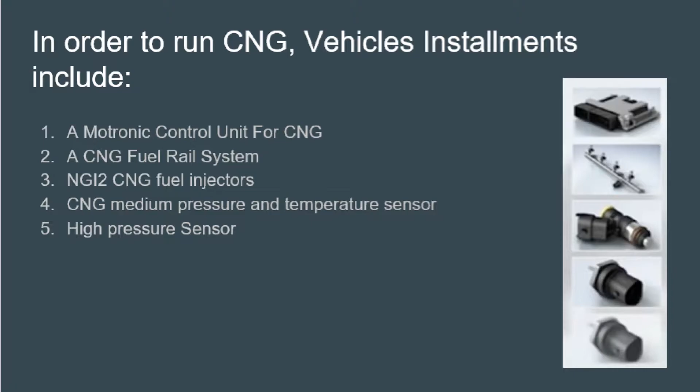So in order to run a vehicle off of CNG, they will need to be equipped with a Motronic control unit for natural gas, a CNG fuel rail, NGI2 CNG injectors, CNG medium pressure and temperature sensors, and a high pressure sensor. So the way a CNG engine works is during the drive, a bi-fuel system can switch from natural gas to gasoline operation with no change in torque.

During CNG operation, fuel lines conduct natural gas from the fuel tank where it is kept under high pressure to the pressure regulator. The high pressure sensor continually monitors pressure levels in the high pressure system. Within the pressure regulator, the natural gas is brought from 200 bar down to 10 bar. From here, the natural gas is conveyed via the CNG fuel rail to the injection valve. The CNG medium pressure and temperature sensor measures the temperature and the pressure in the rail system.

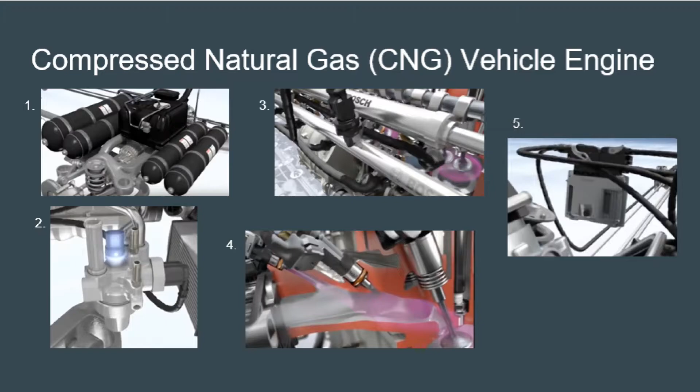According to exact specifications, the NGI2 injectors now inject the natural gas into the intake manifold. The resulting natural gas air mixture is then ignited by a spark plug. The Motronic control unit for natural gas handles engine management throughout the system.

Now let's talk about the cost of CNG usage in vehicles. The primary driver behind why companies would want to use natural gas as a fuel in vehicles is the difference between the cost of diesel or gasoline compared to the cost of CNG. All natural gas projects require an upfront investment that needs to be paid off with fuel savings, and those fuel savings have been consistent and growing over the years, and the EIA projects that they'll continue growing even more.

However, there are challenges faced when implementing a new design. In order for transportation vehicles to run off CNG, a conversion kit installation on cars is necessary. Conversion kit manufacturers that make kits to convert gasoline engines to use CNG will require an upfitter's cost to put the kit on the vehicles. This obviously increases cost. Each kit engine combination requires a certificate of conformity from the Environmental Protection Agency, basically saying that it meets the emission standards. But that also kind of limits the number of vehicles being offered as a CNG version.

The cost of CNG vehicles depends on the size of the vehicle and the range the vehicle needs to travel. The size of the vehicle matters because smaller vehicles traditionally use a gasoline engine. Gasoline is simpler and cheaper to convert to a natural gas engine because it's spark ignition. You also have a lot of the same attributes and components of the engines. Larger vehicles, however, use a diesel engine which relies on compression ignition, so having to change the ignition in the engine is going to drive up cost because it is going to require more engineering.

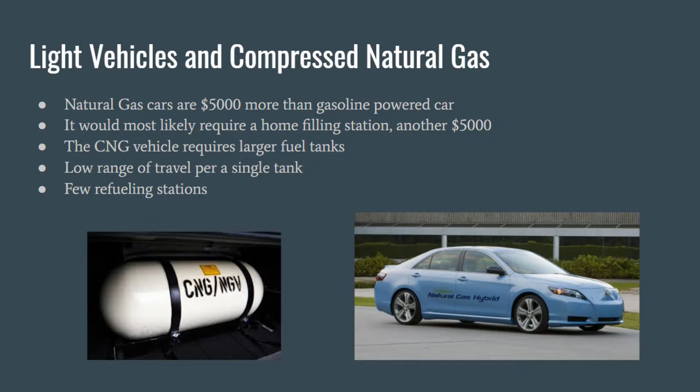The cost of converting the current industry of personal cars from gasoline to natural gas makes it very unattractive. This may change as gasoline becomes more expensive and the natural gas industry grows locally.

Now, as for heavy vehicles, natural gas fuel sees most of its efficiency with heavy vehicles used for commercial and public use. Heavy CNG powered vehicles are under the same limitations as cars, and maybe even more as the hauled weight calls for almost daily refueling. Many companies, such as the Centre Area Transportation Authority, CATA, have been using CNG for their fleet for many years.

The biggest potential for natural gas is with long-haul trucking using liquid natural gas. Liquid natural gas is roughly a time and a half more dense than gasoline. This increases the range per tank of fuel and solves the problem of refueling stations and low range of CNG. Specialized refueling stations already in place for large vehicles, such as tractor trailers, can more easily have a natural gas option implemented into the existing infrastructure. This will allow these trucks to span the country on natural gas.

The upfront costs to convert fleet vehicles to natural gas can be offset by lower operating and maintenance costs over the lifespan of the vehicle. The payback period depends on the fleet's average distance traveled, required refueling infrastructure costs and other considerations. A truck running on liquid natural gas will begin making a profit in just 5 years after purchase.

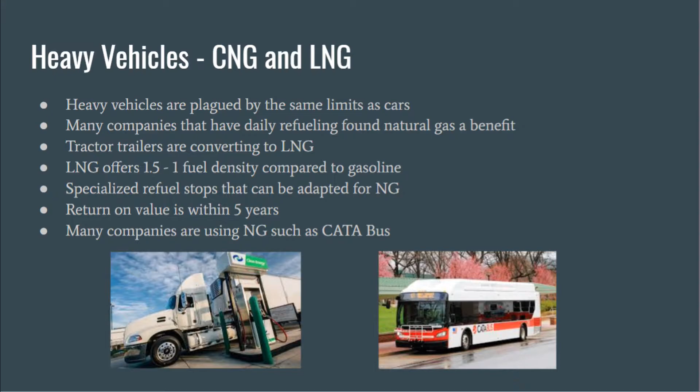A number of concerns arise when it comes to vehicles with natural gas tanks and engines. For instance, a car collision where the fueling system becomes compromised can be dangerous for all, especially those unfamiliar with NGVs. It is crucial to notify those on the scene, including any first responders who are very up close and personal with the vehicle involved. It is also pertinent to properly identify what type of natural gas the vehicle runs on, so that the respective measures can be taken in order to stay safe. It is suggested that the vehicle be inspected before returning to the road, so it's best to get a tow instead of taking chances.

Liquid natural gas is stored and remains at extremely cold temperatures. It is significantly more dense than air and tends to puddle up in fog clouds near the ground when it leaks. This fog is incredibly dangerous and needs to be avoided until it can be properly contained or removed from the scene. Compressed natural gas is a lot less dense than its liquid counterpart, and air alike, so it most often dissipates into the atmosphere when it leaks. Any amount that remains tends to give off an odor like rotten eggs, which is easily identifiable. As with conventional fuel, both types of natural gas are flammable and dangerous when in contact with skin, as well as when fumes are inhaled.

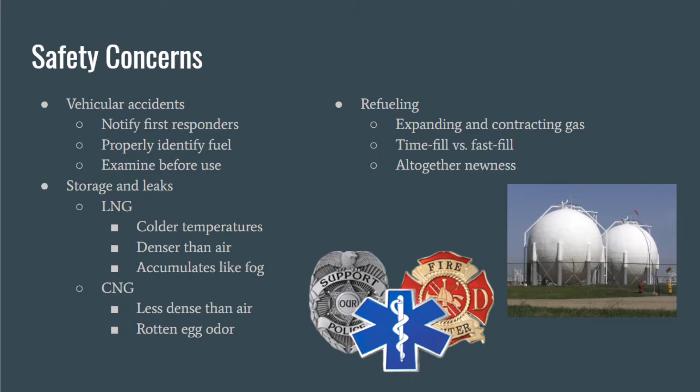The overall newness and differences between fueling conventional fuel and natural gas is often enough to cause difficulties. If we have learned anything from Oregon in the last year, it's that teaching people how to fill up their tank isn't always easy.

Energy security for the United States, once considered an impossible goal, is now within our reach with the abundant supplies of natural gas available today in North America. We've been using natural gas in our homes and businesses for heating, hot water, and cooking for more than 100 years. But natural gas can also be used to fuel vehicles. Compared to some other vehicle fuels, natural gas is clean, abundant, affordable, and American.

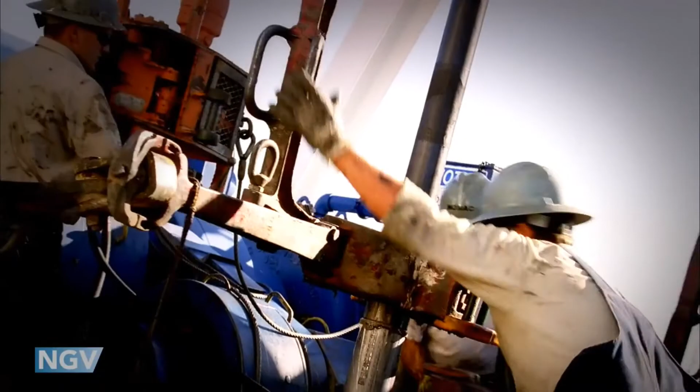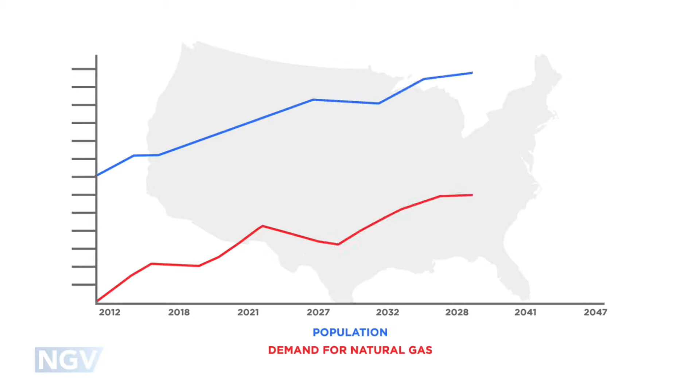Recent technological and economic developments are providing greater access to large reserves of natural gas under North American soil. Today, these reserves are projected to meet U.S. energy needs for generations to come. Natural gas vehicles, which are sometimes referred to as NGVs, have been around for decades, operating on roads around the world. NGVs are available in all vehicle classes, including passenger vehicles, transit and school buses, refuse, and heavy-duty trucks.

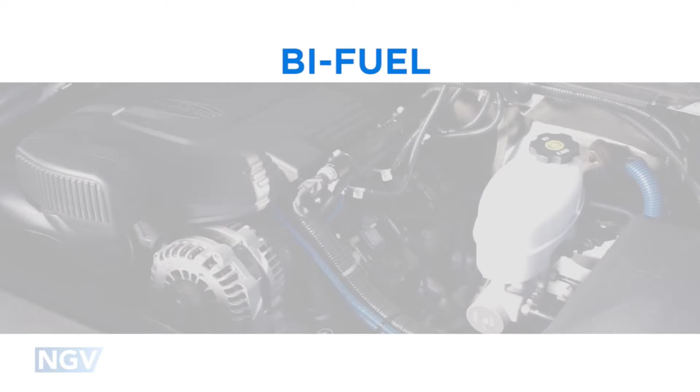NGV engines operate in a manner that is very similar to gasoline or diesel engines, except that natural gas combusts in gaseous form rather than as vapor. NGVs are available in two basic configurations: dedicated NGVs and bifuel NGVs. Dedicated NGVs run on one fuel only, compressed or liquefied natural gas. Bifuel NGVs have internal combustion engines that run on natural gas and gasoline.

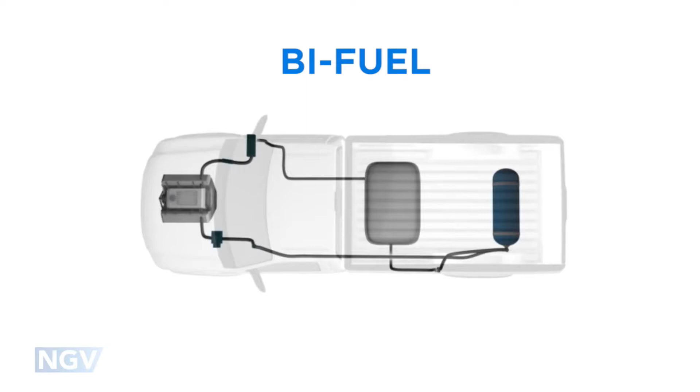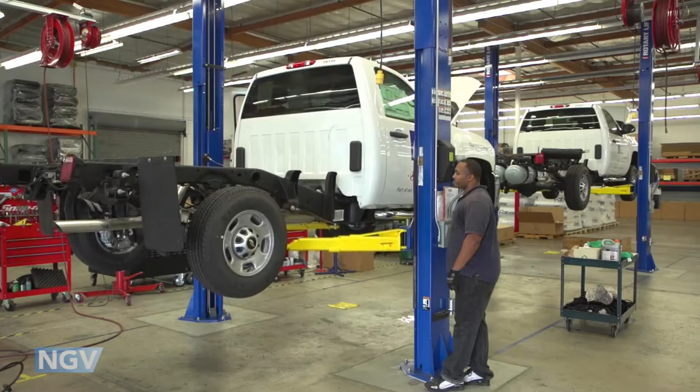With bifuel vehicles, the two fuels are stored in separate tanks and the engine runs on one fuel at a time. Factory-built NGVs are available from various automotive manufacturers. Additional vehicles that are powered by compressed natural gas are also available through a conversion process. One of the benefits of NGVs is the price advantage that they offer over gasoline and diesel-fueled vehicles, which can be significant. Natural gas is less expensive than other vehicle fuels, and its price is less affected by the unpredictable changes in the world's oil market.

As a result, drivers of natural gas vehicles can save 40 to 50% per gallon at the pump compared to gasoline and diesel. This price difference can result in significant fuel cost savings year after year. Large transit or trucking fleets switching to natural gas can save millions of dollars per year. In recognition of their environmental benefits, solo drivers of NGVs are allowed to use the HOV or carpool lanes in several states.

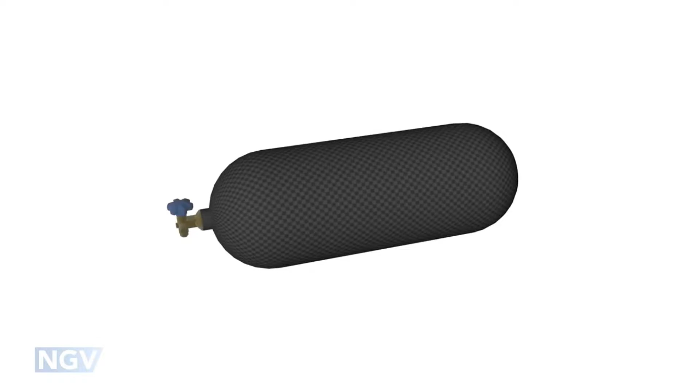Natural gas vehicles have a safety record similar to vehicles powered by other fuels. The fuel tanks or cylinders that hold the natural gas fuel on the vehicle feature robust designs and are engineered to provide years of reliable service. Natural gas is one of the cleanest alternative fuels today. NGVs produce fewer smog-forming pollutants compared to most diesel and gasoline vehicles on the road. Renewable natural gas, or biomethane, is an even greener fuel by offering reduced greenhouse gas emissions, which contribute to climate change.

There are more than 15 million natural gas vehicles already in operation around the world today. These numbers can only continue to grow as more NGV options become available and consumers recognize that natural gas for vehicles is clean, abundant, affordable, and American.

All right, now to address the issue of using natural gas to fuel planes. So for using natural gas, or more specifically liquid natural gas, to fuel planes, it's already in development. The issue as to why it's not spreading as quickly as it did for trucks and buses are the following. The natural gas industry at its current state does not allow it to expand. There are specific parameters that need to be followed in order to use liquid natural gas for plane fuel, and there's a lack of technology that prohibits us from actually using it safely for planes.

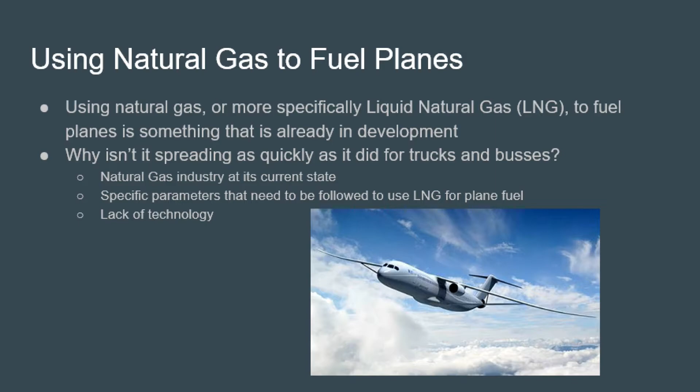Now, the issues surrounding natural gas for planes fall into three different categories, as I just mentioned. The first being the natural gas industry, being that there's not as many natural gas suppliers as there are fuel suppliers. So you'd have to actually increase the number of stations in order to get enough natural gas to fuel planes to make them more frequent than jet fuel planes. Another is that natural gas needs specific parameters in order to be used safely. One of the largest barriers to overcome is the fact that liquid natural gas reacts violently with water.

Another thing is that liquid natural gas needs to be kept at specific pressures throughout the entire flight, even though the plane is changing pressures as you make your entire flight. You need to keep the liquid natural gas at the exact same pressure the entire time in order to reduce the possible dangerous side effects of using liquid natural gas.

Another thing is that safety tests, in order to actually implement liquid natural gas into planes, would take about 5 to 7 years to even complete before liquid natural gas planes could even hit the market. The last thing is that the technology isn't there. One of the things that we would actually need in order to use liquid natural gas for planes is a superconducting system to keep it at the correct temperature.

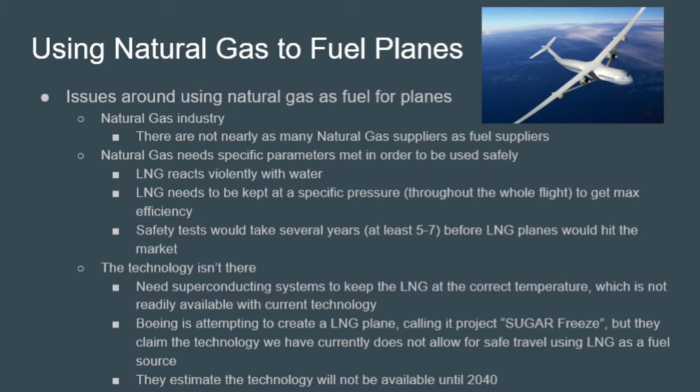Now, while there are issues with using natural gas for planes, there are obviously many benefits. One of the benefits being that liquid natural gas evaporates quickly when exposed to ambient temperature, and it will not pool dangerously like traditional jet fuel. So in the case that you end up getting in a crash again, say it's on land, you wouldn't have pooling like you would with jet fuel if the fuel line breaks. The liquid natural gas would just evaporate and you would have a much more reduced chance of explosions.

Liquid natural gas also has a higher ignition temperature. Again, you would have a less likely chance of an explosion as opposed to jet fuel. The liquid natural gas will not combust as easily. It is also much more fuel efficient than jet fuel, which is the primary reason for switching from jet fuel to liquid natural gas. Boeing predicts that they will actually reduce the fuel burn by 57% by using liquid natural gas instead of jet fuel.

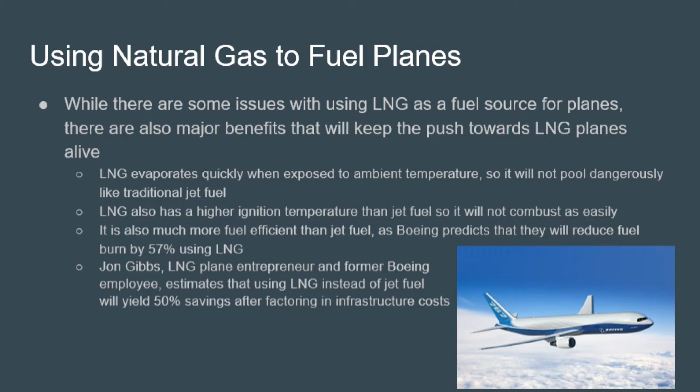Jon Gibbs, liquid natural gas plane entrepreneur and former Boeing employee, estimates that using liquid natural gas instead of jet fuel will yield 50% savings after factoring in infrastructure costs. Natural gas as a transportation fuel source has been around since the 1930s. According to the Natural Gas Vehicle Coalition, there are more than 150,000 natural gas vehicles on the road today.

However, even though natural gas technology has improved in recent years to allow for proliferation of natural gas vehicles, there are still some challenges that natural gas vehicles face when it comes to infrastructure and practicality of using natural gas as a fuel source. As a transportation fuel source, it has a few similarities to gasoline. For example, a compressed natural gas tank is a storage device of similar size and shape and can be stored in the same locations as on a gas car. Also, a compressed natural gas tank can be filled in a similar manner as a gasoline tank.

However, the disadvantages natural gas faces in the transportation field are substantial. A few examples of problems these vehicles face have to do with the infrastructure and economic drawbacks surrounding using natural gas as a fuel source. Natural gas infrastructure in the United States is far less developed than it needs to be in order to grow an aggressive expansion in the transportation sector using natural gas as a practical economic competitor to gasoline.

Some of the challenges facing natural gas vehicles are a higher initial cost of ownership, a very limited refueling infrastructure, and some of the performance characteristics of natural gas vehicles. Initial cost of creating a natural gas vehicle is generally higher than its gasoline counterpart. A study in the University of California shows the difference in price between two identical models. The 2014 Honda Civic is a difference of over $8,000, more than 40% more than its gasoline counterpart.

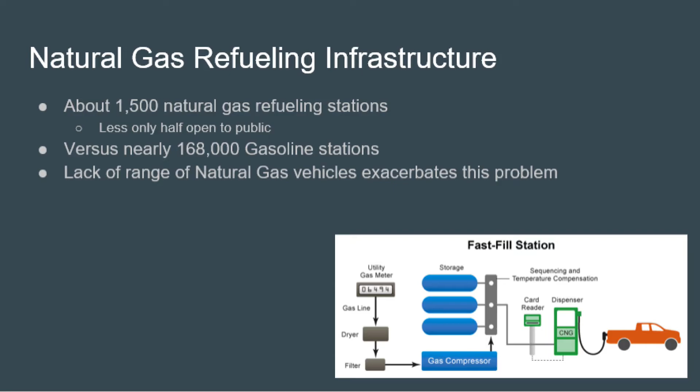Finally, the lack of range of natural gas vehicles makes them difficult to rely on for trips of significant distance because of the lack of infrastructure surrounding these vehicles. However, once these challenges are overcome, natural gas can be more economically practical than gasoline, especially for vehicles that are focused around using high volumes of fuel like taxis, semi-trucks, and buses. In the past, natural gas vehicles have been about 30% less expensive than gasoline vehicles to refuel, and in many cases, the maintenance cost for natural gas vehicles is less over time than their gasoline counterparts.

In a more macro sense of economics, natural gas vehicles have the ability to reduce the United States' dependence on foreign oil, creating a safer and more stable energy supply in the United States. In addition, compressed natural gas prices are much less volatile on average than gasoline. A large reason for this is the politics of trading and deals around the world. While crude oil is largely supplied to the U.S. from outside sources, the reserves of natural gas inside the U.S. are large and the potential for more supply is great, so prices have been in the past and continue to be much more stable than gasoline.

And here is a quick video to help explain a little bit more about using liquid natural gas or compressed natural gas in transportation.

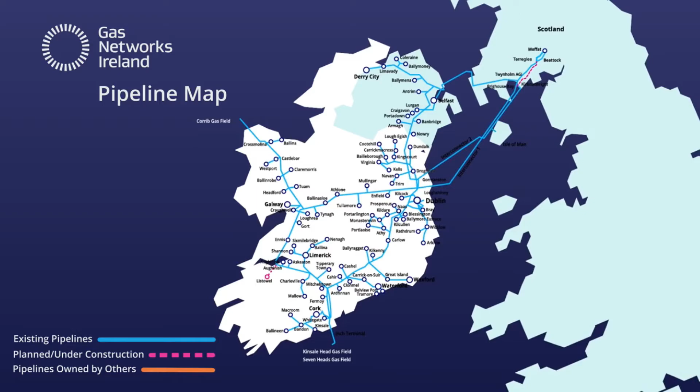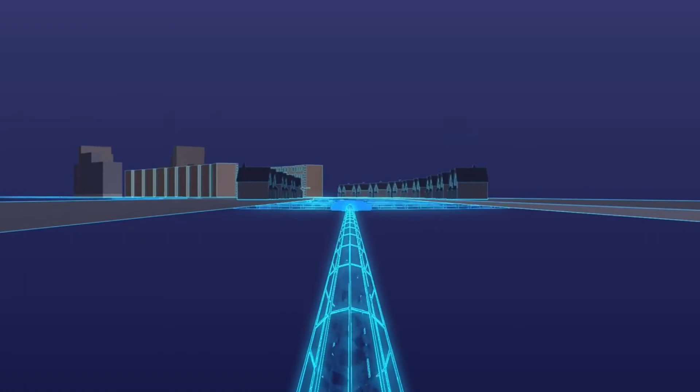Gas Networks Ireland own, operate, build and maintain the natural gas network in Ireland and connect all customers to the network. We ensure the safe, efficient and secure supply of natural gas. Compressed natural gas is a global alternative to diesel or petrol as a transport fuel. It's the same natural gas used to heat our homes or cook our food. It's simply compressed to fit in the fuel tank of a natural gas vehicle. It's a proven, reliable technology used in over 19 million vehicles worldwide and 1.9 million vehicles in the developing European market.

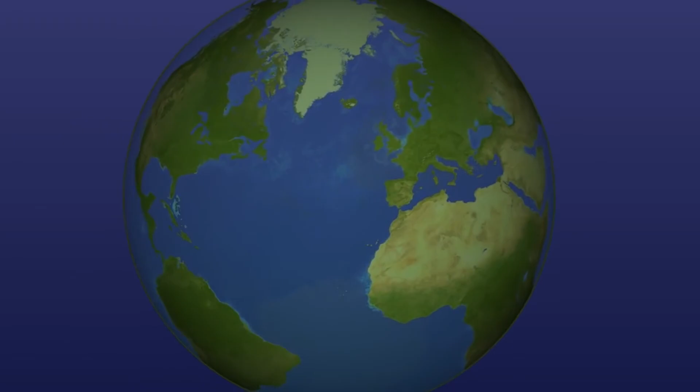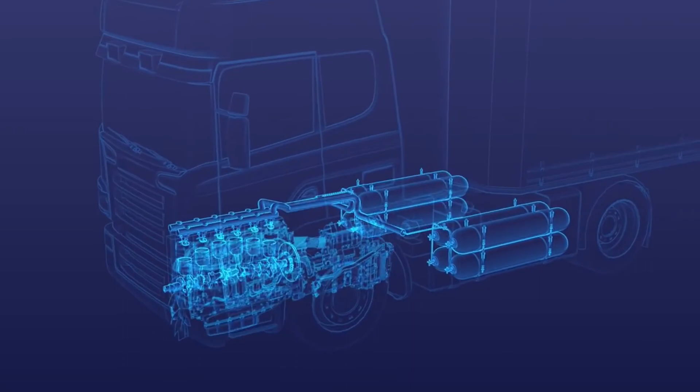So here's how it works. Natural gas is transported through existing gas pipeline infrastructure to a CNG refueling station. Here, the gas is compressed and stored before being distributed to a natural gas vehicle through a natural gas dispenser. After the CNG enters the vehicle, the natural gas engine operates much like a diesel or petrol engine, with the only differences being the fuel line and fuel tank. Natural gas is pivotal in the future of transport. CNG in transport is a global alternative to diesel or petrol, offering a cleaner, cheaper and proven fuel solution for your fleet of trucks, buses and vans.

So now we'll talk about natural gas supply. As previously mentioned, the availability of natural gas as transportation fuel relies on the proper infrastructure being available. The number of active rigs in the United States has decreased dramatically over the last decade. In 2007, there were about 1,450 rigs operating across the nation, but last year, less than a seventh of that number were active. Despite this, significantly more natural gas is being consumed today than a decade ago or in the years before.

In 2007, 23,100 billion cubic feet of natural gas was consumed, 646 of which were for transportation purposes. In 2017, 26,800 BCF were consumed, and about 728 were used in transportation. Many stations in the U.S. are privately owned, but there are currently 931 compressed natural gas stations and 73 liquid natural gas stations available to the public. This number is expected to increase in the coming years.

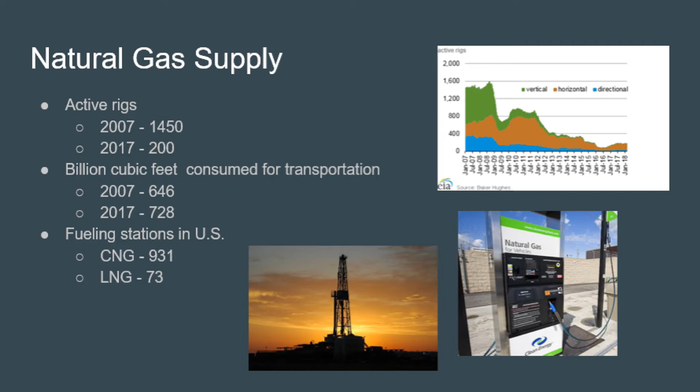So, new developments. The nation has been incentivized to turn to natural gas as a fuel alternative. Federal laws and taxes have been set in place in order to bolster new interest in NGV. The Alternative Fuel Excise Tax Credit ran up through December of 2017 and gave a tax credit of 50 cents per gallon of natural gas.

The natural gas vehicle weight exemption allows NGVs to exceed the federal maximum gross vehicle weight limit by the amount equal to the difference in weight from the natural gas fueling system to a diesel fueling system. These vehicles now become preferable to fleet drivers that carry freight and travel long distances.

Aside from this, the Environmental Protection Agency has gotten involved in many efforts to reduce emissions through transportation, including the National Clean Diesel Campaign that regulates diesel engines and fuels. As we have mentioned in class, the EPA has also regulated the renewable fuel standard that requires that a certain amount of renewable fuel be injected into transportation fuels in order to have cleaner exhaust and reduce our reliance on foreign countries for imported oil.

The 2018 fuel volumes have been finalized so that by the end of this year, 19.3 billion gallons of total transportation fuel come from renewable sources. This amounts to 10.7% of total fuel volume.

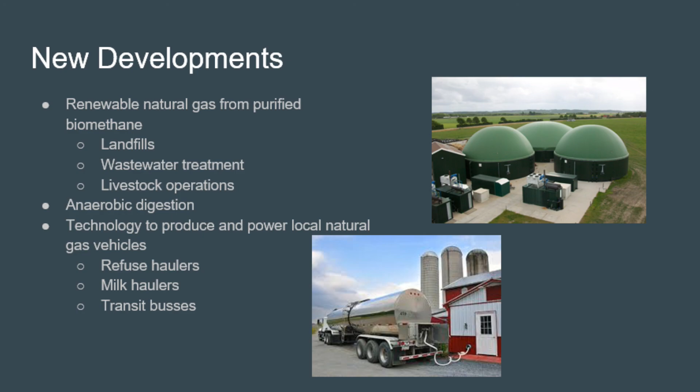The Vehicle Technologies Office has identified over 300 landfills that actively produce biomethane, each up to 200,000 gallons of LNG per day. Large farming operations use manure digesters to produce methane that in turn powers appliances and provides other benefits to the farm. Only a portion of this power is used, which allows the rest to return to the grid, or in our case, remain as biomethane to purify for transportation fuel. Landfills and livestock facilities alike use this technology to power local natural gas vehicles such as refuse haulers, milk haulers, and transit buses.

In conclusion, natural gas is used to power various vehicles because of the relatively cheap cost and lower emissions. However, the differences in conversions from traditional fuel systems can present some challenges for running CNG vehicles. And the lack of availability to the public and new implementations also produce challenges. And this can lead to a new development in fuel sourcing for CNG and LNG.